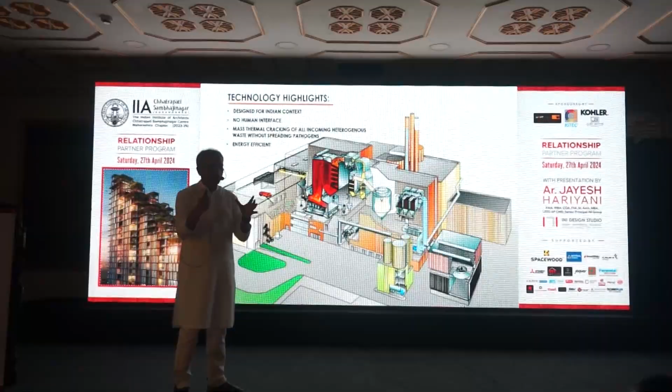And then we figured out with client what is the most efficient way to organize this. So the idea was that we questioned that, ये तो ऐसे ही बनेगा.

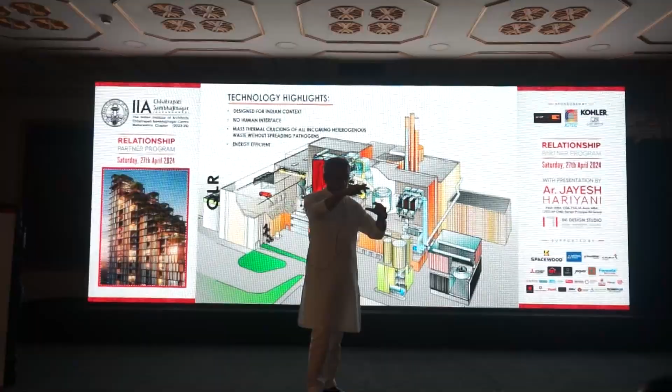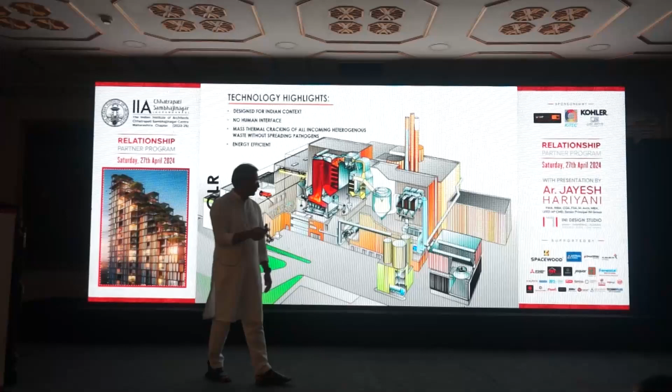Then we said, why can't we put this equipment on top of this equipment so that we can use less land? And we say, oh no, नहीं ऐसा तो नहीं हो सकता है. क्यों नहीं हो सकता है? Well, हमने ऐसे ही किया है. So you have to get negotiation of that, and then we stacked a lot of equipments on top of each other, and the only site we used is 40%.

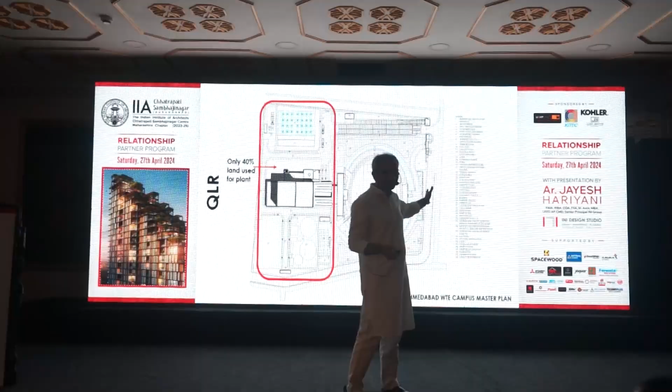Rest is now available for the community nearby, the slums, whose kids have no real social space, no real playground. So we started mapping those and planning that.

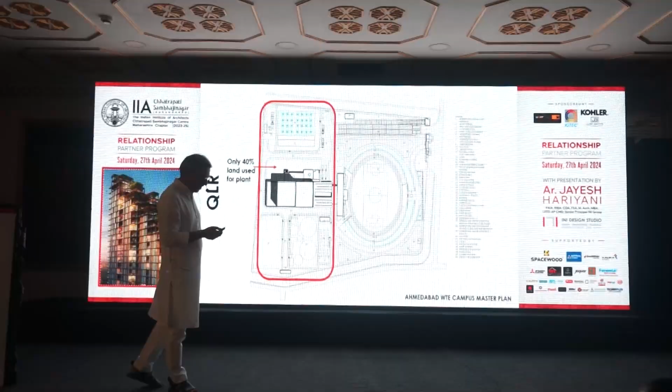So when you drive this type of a thing, and Bhumi Pujan या तो foundation laying, most of such public projects, you know, वो बड़ी speech आती हैं, 10, 12, 15 गाड़ियाँ आती हैं और वो सब show होता है. Versus here the private client was really supporting, and together we said nothing doing of that sort. We will just have the tree planting drive on the ground breaking day. और काफ़ी लोग वो कर रहे हैं, and till date about 12,000 trees are really flourishing on that location.

The construction activity, I mean the engineers, the PMC team, the laborers, workers, everybody is so enjoying while the project is getting built, because the environment is so unique and positive. And some of the final images. I'm glad that the music also is really helping some of these wonderful images. So nature does its job, right? We have to just go along with it.

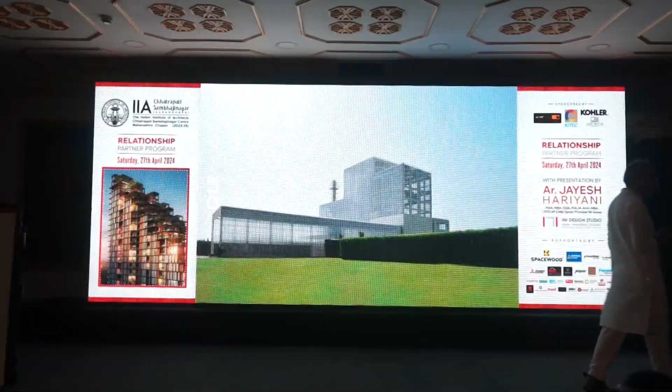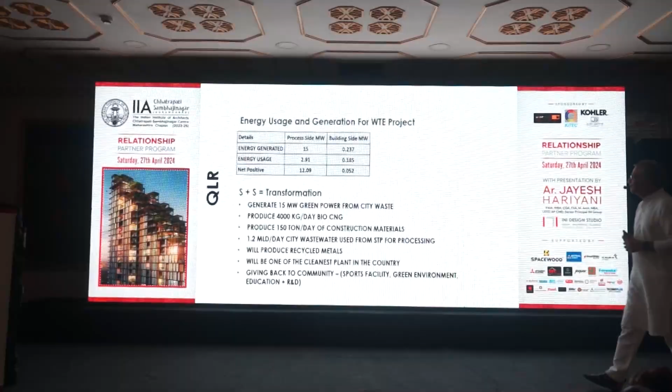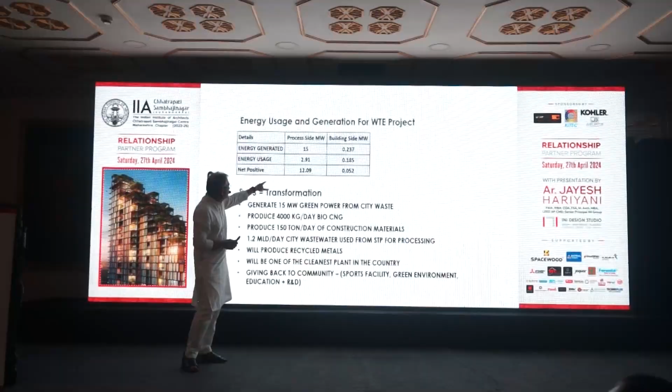And we didn't use just those monster cooling towers or those things. We used this unique misting system which really cools down the entire campus by a few degrees and provides a microclimate of its own to the plants and trees around. The bottom line here is that the total process side is net positive and total building side net positive.

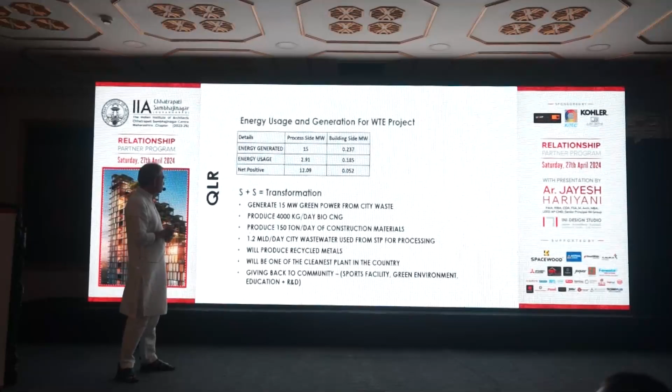So both sides we could achieve net positive in terms of the energy and total transformation for the nature neighborhood by so much of green around it and having a sports facility, and the research cell of its own generates green energy. On top of that, which was never in the brief, it produces about 4,000 kg of bio CNG, produces about 150 tons per day of construction recyclable material.

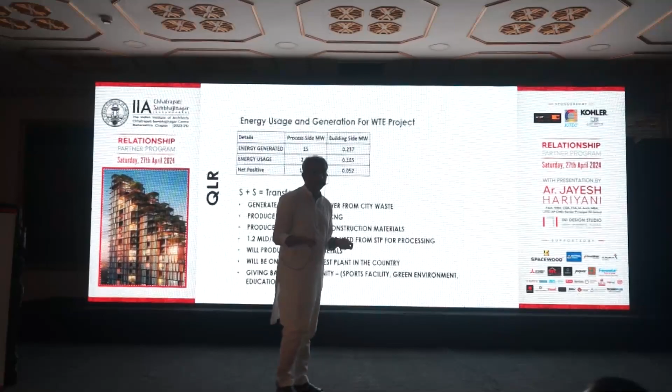On top of that, this type of a plant uses a lot of processed water. And we said we would be doing a crime if we use real fresh water for such thing. So बगल में जो STP था उसका reject water को filter करके we started using about 1.2 million liters a day of that for the processing, which was diverted into sea. Crime, which we diverted here, treated it, used it, and so it's another positive thing to do, and it is the cleanest plant in the country and gives a lot back to the community.

So questioning, learning, seeking can do a lot and can take you a long way, right? Context number 7, and metric 7.

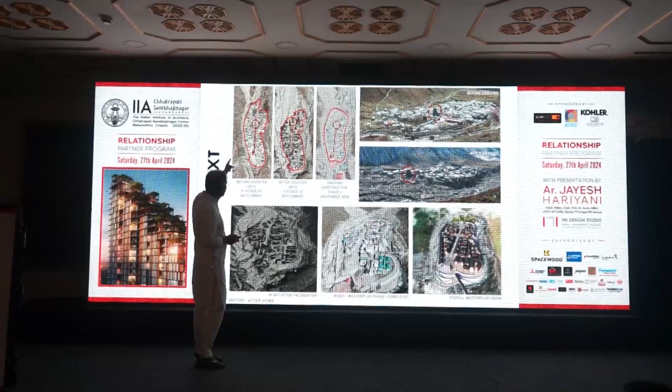Then before the flood, this is what we did from here to there over the years. And this is what happened. Flood just cleaned it up, right? In the map, if you see before flood, after flood, and during construction, again some of the image before and after. So heavy damage, and pretty much most of the structure were either washed away or whichever was left was unsafe to be living with.

And here is where we started. This is the image, same angle, phase 1 completion. So a lot of this work has happened across. So first we started working around the edges of the town, and then the main axis, we opened up the main axis, Arrival Plaza, and so we cleaned it up, the whole thing. And this is the final, when everything is done, that's how it will look.

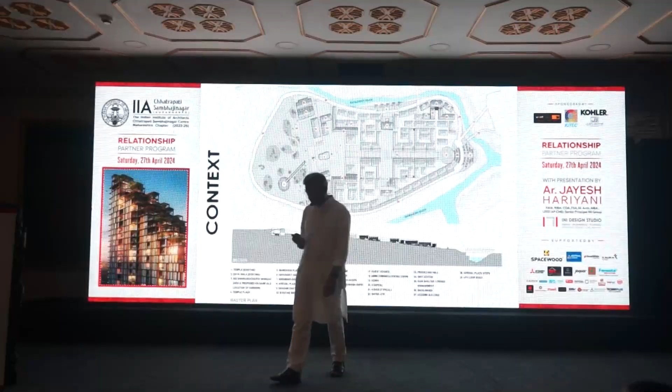I won't go in the details of the master plan, but I think there is a clip that will explain, but you can see the terrain. It's sloping across, the temple is here, and heavily sloping, and the river. So only way you can go is you have to cross the water to get to the island.

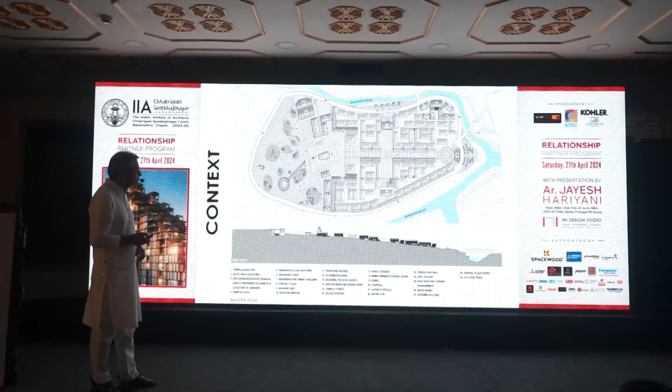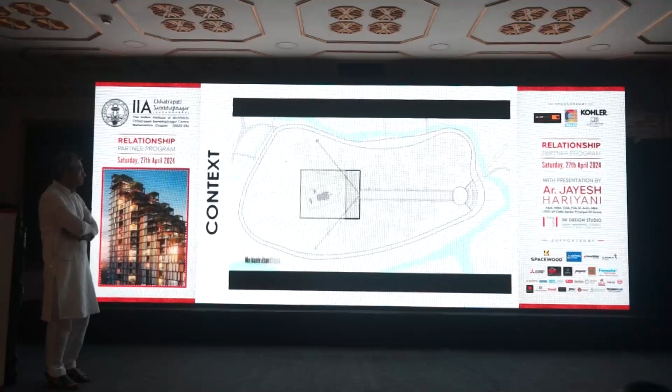Kedarnath, the Hindu pilgrimage site, is situated in the Himalayan mountain range in Uttarakhand at the confluence of the Mandakini and Saraswati rivers. Unplanned settlements of the temple town faced heavy devastation during the natural disaster that occurred in 2013. The overall vision of this master plan is to restore the spiritual glory of this temple town through a series of thoughtful interventions, by keeping the temple as the center of the vision and providing a mesmerizing experience to the pilgrims. The master plan is envisaged with minimal environmental impact, considering highest sustainability measures, and by involving key stakeholders' input through a participatory planning methodology. It is periodically reviewed by various state government officials and the committed private players, including JSW Group, under the personal guidance of the Honorable Prime Minister.

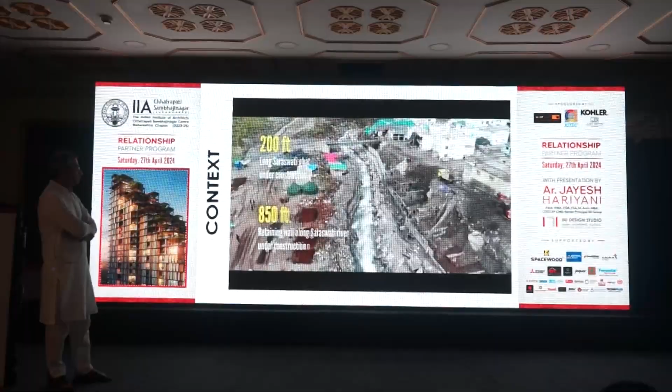The road from Gauri Kund is not motorable. The execution and the mobilization of a project of this scale in extreme weather and geographic conditions of Kedarnath is a great challenge. It was important to restore the shape of the island by reclamation of washed out land and construction of multi-tiered protection walls along the Saraswati and Mandakini river edges as a part of the disaster management strategy. The 10 feet narrow temple street prior to the disaster had many damaged buildings with 30,000 tons of debris spread around. The debris were leveled along 840 feet long stretch by developing a monumental stepped temple street. It is constructed using 20,000 locally available stones dressed by the regional craftsmen. The 104 feet diameter arrival plaza at the confluence of the two rivers is constructed by using 51,000 local stones laid in a radial formation. The temple plaza is constructed of 15,200 local stones laid in 4,340 square meters of area.

The Tirth Purohit houses are being constructed phase-wise by following the local architectural style with the use of local stone and wood with slate-tiled pitch roofs. The redevelopment of Adi Shankaracharya Samadhi is also part of this proposal. The subterranean design of the Samadhi allows pilgrims to experience a unique journey by walking between the monumental walls to approach the Samadhi, revealing the statue, and ending this journey by walking through a park of contemplation featuring boulders strewn on the mountainside. There is a provision of a light and sound show based on the mythologies related to Shiva, which is to be performed during every opening and closing ceremony of the pilgrimage season. Record-breaking 7.25 lakh pilgrims have visited post-Phase 1 implementation, which is projected to increase every year as various developments take place in Kedarpuri region along with this master plan. Kedarpuri is designed with sustainability at the heart of it and is said to be the first Indian Green Building Council certified hill town development and will set a benchmark for future hill towns.

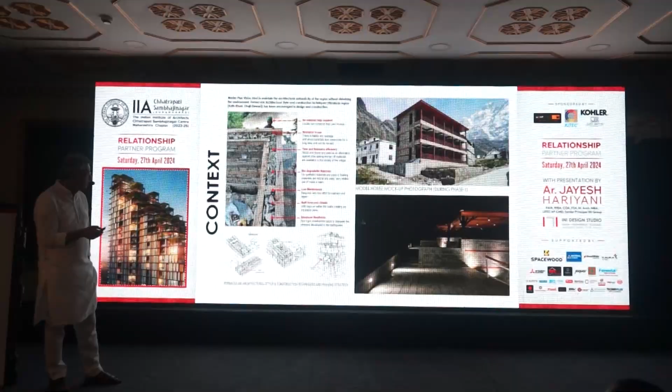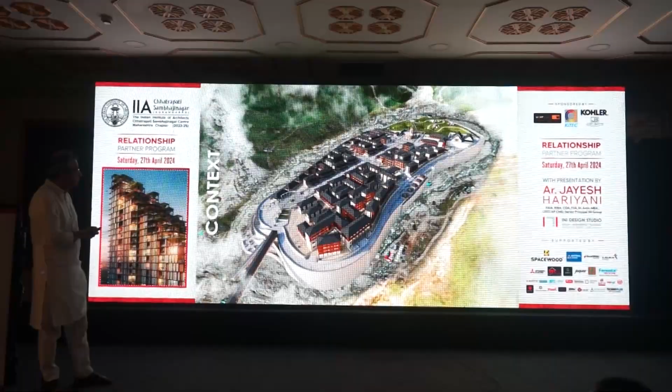Some of the, during construction and the mock-ups that we did, some of the construction technologies that we researched, and how stepwise, phase-wise you negotiate with the local community to take buildings down and rebuild is a painful, long process, negotiating all this. And this is just the watercolor when all said and done. This is how it would feel.

This is post phase 1, the first time the pilgrim season opened. Some more details. This is the Samadhi which is completed, which we really did underground because the temple has to be more prominent rather than any other structure. But the experience being underground and seeing all these mountains around and the sky is magnificent. So that's where the Samadhi is, behind the temple.

So, context. If you see the previous projects and these projects, each one has a different language, different style based on what the site really offers, right? It's not that we have one style. Many times you can say that each architect will have their own style, and looking at the building you will say, oh, ये तो उसने किया है. Versus we have no style, the style will emerge from our process.

Innovation, number 8. And when we say innovation, it's not like an aha moment कि वो E is equal to MC square हमको निकालना है. It's smaller things also, that हाँ पहले ऐसे कर रहे थे but अभी ऐसे कर सकते हैं differently. That's also a small innovation that you can integrate, right? Like in the WTE project, waste to energy project, we questioned a lot.

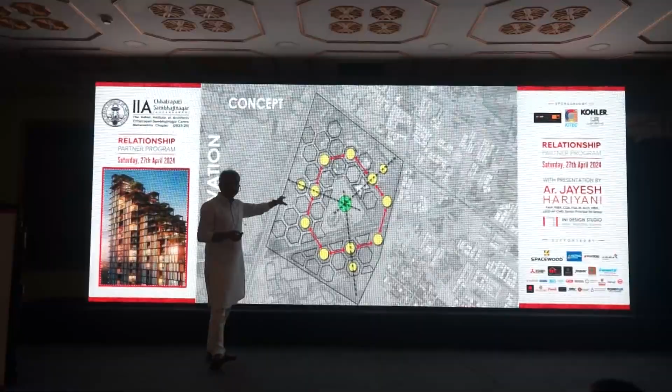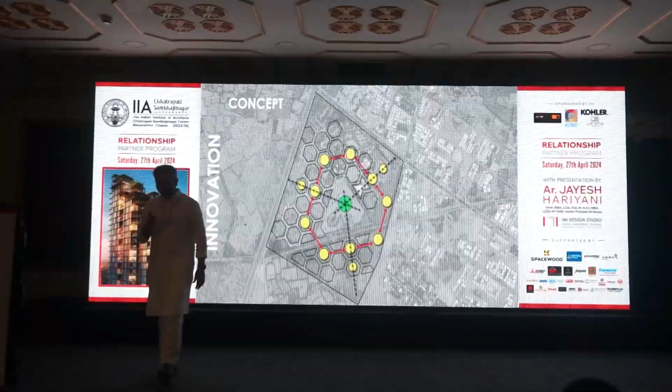सो वी स्टार्टेड मास्टर प्लानिंग। वी फॉरगॉट अबाउट आवर प्रोजेक्ट एंड हेक्सागोन कि हमको तो एक्वेरियम करना है, हमको मास्टर प्लान नहीं करना है। राइट, तो वी स्टार्टेड कि क्या कर सकते हैं विथ दिस हेक्सागोन टू इम्प्रूव ऑल दिस, एंड वी स्टार्टेड जेनरेटिंग एंटायर मास्टर प्लान एंड वी डिड दिस। This is about 200 plus acre science city जिसमें ये हैं। So we generated the whole experiences.

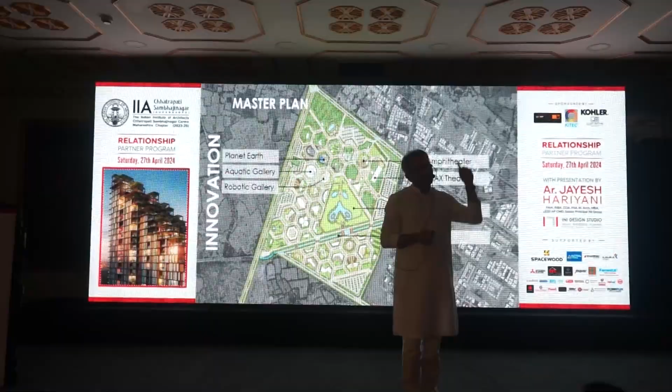But एक चीज़ होता है कि आप अगर with a true spirit, if you do something, what I have found in my life, nature will join you and will realize that project। तो वो भी हमको मास्टर प्लान का भी प्रोजेक्ट हमको मिल गया, जो हमने सोचा नहीं था। राइट, तो धीरे धीरे वो ऐसे शुरू होता है ना।

सो देन वी आफ्टर एटलीस्ट गेटिंग अ कंफर्ट कि भाई नहीं कुछ अच्छा बनेगा ओवरऑल व्हेन थिंग्स प्रोग्रेस, एंड देन वी केम बैक विथ द हेक्सागोन which was given to us। So we designed few things within that। So robotics gallery was there as another program, an aquarium। So these were phase 1 projects। We did proposal for both, and I'll cover the aquarium project today।

तो एक्वेरियम में जाते जाते क्वेश्चन ये आया कि व्हाट विल इंस्पायर अस एज अ फॉर्म गिवर डिज़ाइन। तो लाइफ का शुरुआत पानी में हुआ, पानी से हुआ, वो एक स्टोरी निकली। सो वी सेड ओके, एंड देन पानी का शुरुआत कैसे हुआ, तो कि भाई ऐसे गैलेक्सीज घूम रही है, सर्कल कर रही है, और काफ़ी वो सब स्टोरीज निकल के आई। एंड देन सो वन एस्पेक्ट दैट moving of a galaxy or moving of a shell or such thing came to the surface, that if we drive up design thought on that, that would be more meaningful, because we are going to do a lot of this circulation which has to be a seamless movement as a visitor experience। So that's how it came।

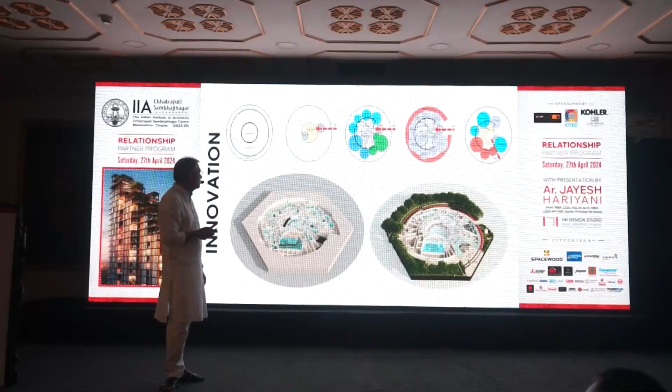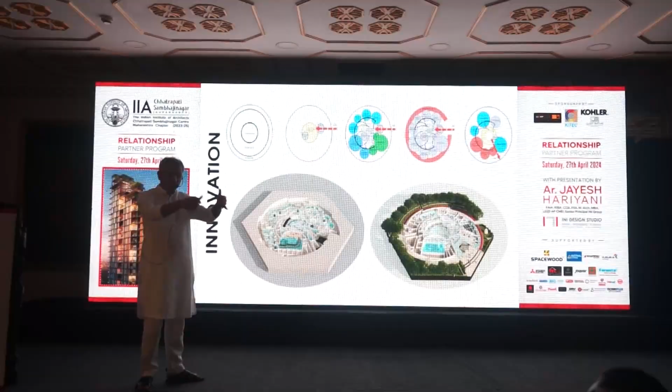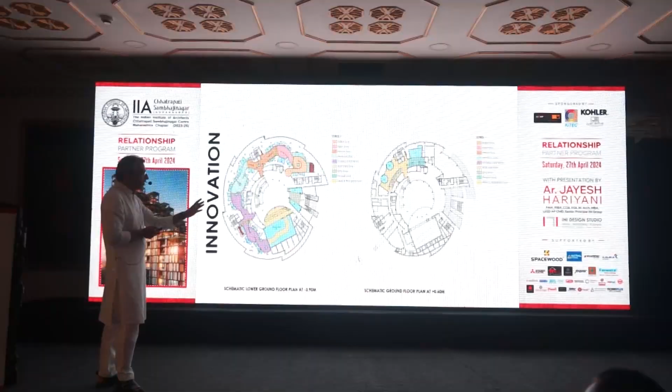and then how these sketches grew programmatically, around this hexagon था, so circle was, after you leave the margin तो एक circle जैसा ही निकलता है, so that also helped creating the entire flow diagrams। Again, I won't go in the plans। I think all this is there on our website and it's published heavily, so you can look at it।

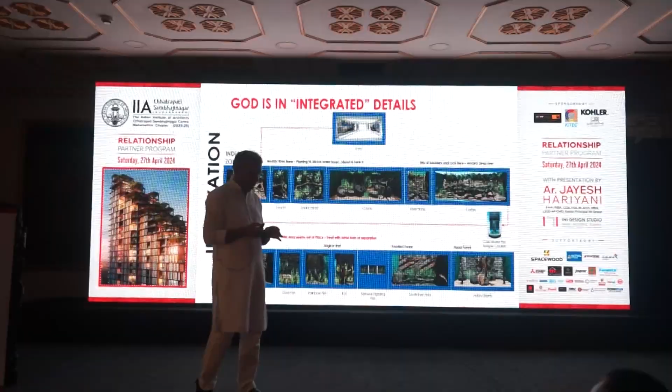लेकिन मैं जो दिखाना चाहता हूं वो दो चीज़ें हैं, कि innovation can happen at every scale। अभी ऐसे प्रोजेक्ट में गवर्नमेंट का एक रवैया होता है कि अगर आप गवर्नमेंट के साथ काम करते हो तो कुछ भी नया करेंगे या तो कुछ भी करेंगे, बंदूक आपके कंधे पे फोड़ेंगे, वो रिस्क नहीं लेंगे, वो कंसल्टेंट के कंधे पे रिस्क ले, राइट?

कि भी कुछ भी हो तो आपका प्रॉब्लम है, इट्स योर प्रॉब्लम, इट्स योर लायबिलिटी एंड यू विल बी ऑन द हुक। और अभी इसमें जो भी लाइव एग्जिबिट्स हैं वो भी हमारी रिस्पॉन्सिबिलिटी, उसका स्पेक भी हमको लिखना है, वो कहाँ से आएगा वो भी हमको लिखना है, कैसे लाएंगे वो भी हमको लिखना है, और आने के बाद क्वारंटीन कैसे करेंगे वो भी हमको लिखना है, और ट्रांसफ़र कैसे करेंगे इन द टैंक, और ट्रांसफ़र करने के बाद उसको क्या खाने का देना है, क्या एनवायरनमेंट देना है, वो भी हमको नक्की करना है। तो एक भी फिश अगर कहीं पे भी मर गई इन द होल प्रोसेस तो पेपर पे आ जाता है हमारा नाम, और सीधा फ़ोन आ जाएगा सीएम से कि भाई आपको इसलिए सिलेक्ट किया था।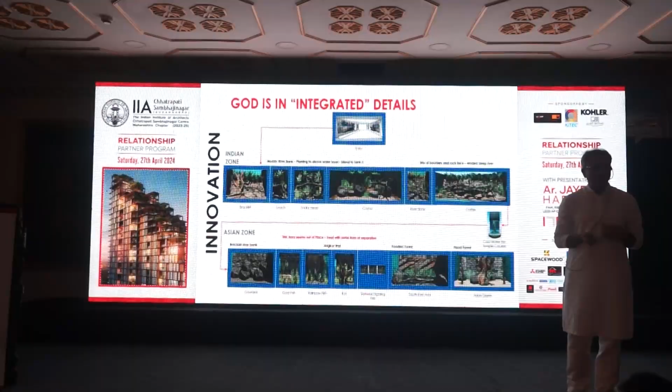मीडिया में मेरे को जवाब देना पड़ता है। मैंने बोला आप ठीक चिंता मत करो, मैं जवाब दूंगा। तो ऐसे भी आपको झेलने पड़ते हैं। सो दिस इज ऑल लर्निंग।

सो वी हैड टू गो थ्रू द एक्सपीरियंस हाउ यू स्टार्ट एट लेवल 1 and then you go through each tank experience throughout the project। But then in the tank, like this is a tank 1 which is exhibit 1 you can say। तो उसमें टोटल क्या नाम होगा, उसकी स्पेसिफिकेशन, वॉल्यूम ऑफ वाटर, वाटर का क्या है, उसके साइंटिफिक नेम जो फिशिस के हैं, कितनी साइज़ की होगी, कितनी क्वांटिटी की होगी, सब हमको देना है, राइट?